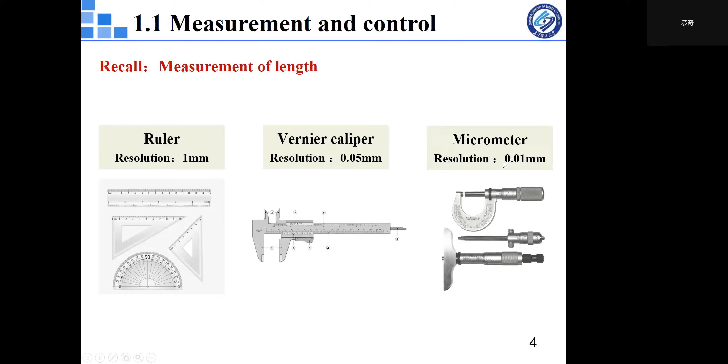And the grating ruler's resolution is up to 0.2 micrometer. The measurement resolution of the laser interferometer is 1 nanometer.

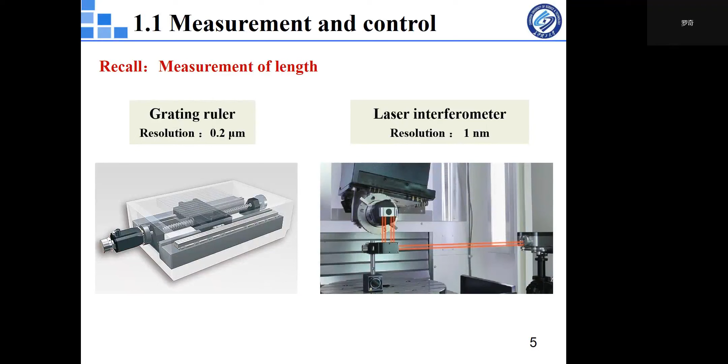One of China's greatest scientists, Qian, said the key technology of the new technology revolution is information technology. Information technology is composed of measurement technology, computer technology, and communication technology. Measurement technology is the key and the foundation.

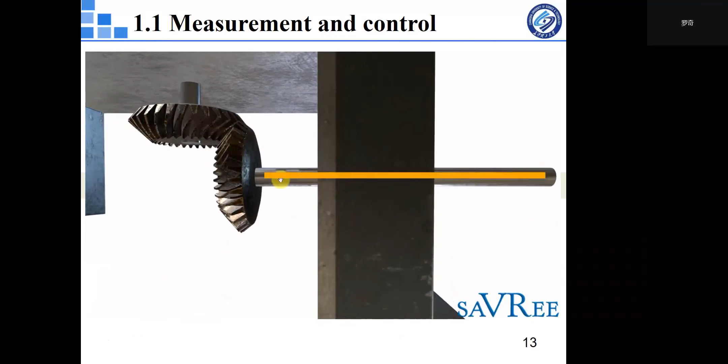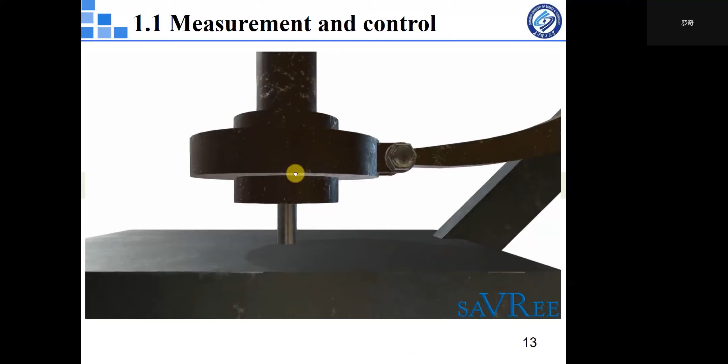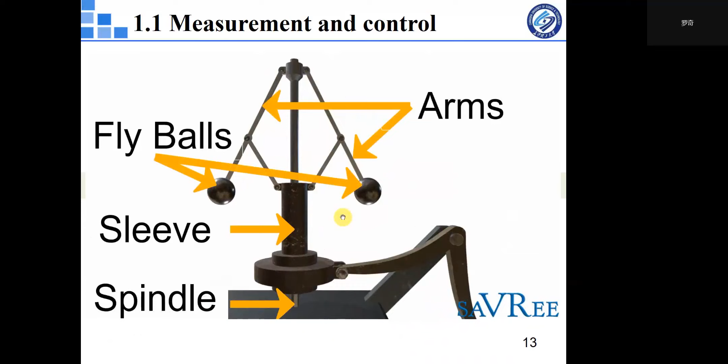Two round objects, the fly balls, then two linkages and two arms. Now what's going to happen is as the centrifugal governor spins, as the whole thing spins, you're going to see the sleeve, the lower piece, moving up and down. See it moves up and down, it's going to the linkage right here, and that is going to then open, change the position of this valve there.

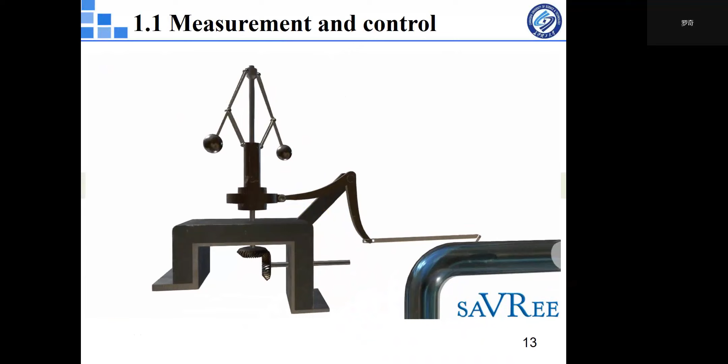So I talked you through how it works, but I probably should have shown you a bit easier. So that's spinning, and it's spinning quite slowly. Now it's increased in speed, so the sleeve has moved up slightly. There it goes up again, I can show you again.

Slowly increase in speed, the fly balls move out, and now they're at the furthest position. Notice that the fly balls now are extended further out from the sleeve than they were originally.

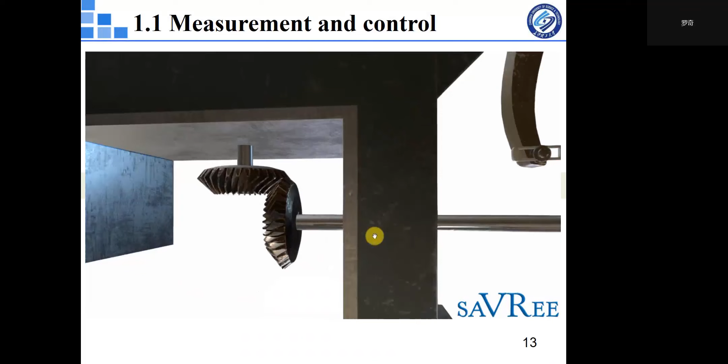What's happening is an engine will be rotating at a certain speed, let's say 100 RPM, and it's going to rotate the horizontal shaft at 100 RPM, assuming the shaft is geared directly. We transfer 100 RPM through the bevel gear here to the centrifugal governor.

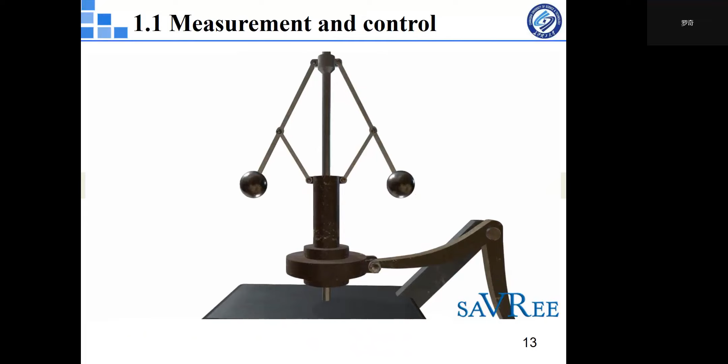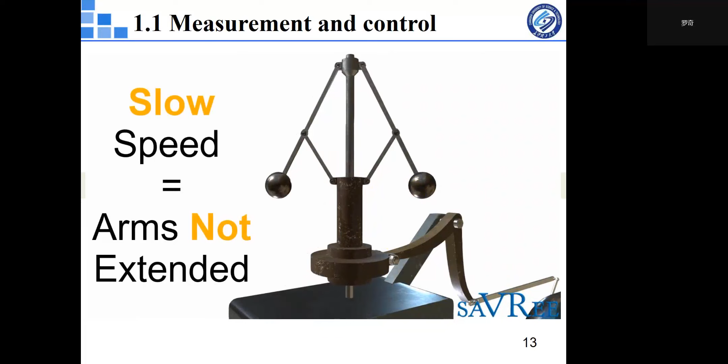Notice the arms are not particularly far away from the sleeve, but at increased speed, let's increase now to 200 RPM, the arms have moved further away. Now to speed it up even further, see the arms are really quite far from the spindle.

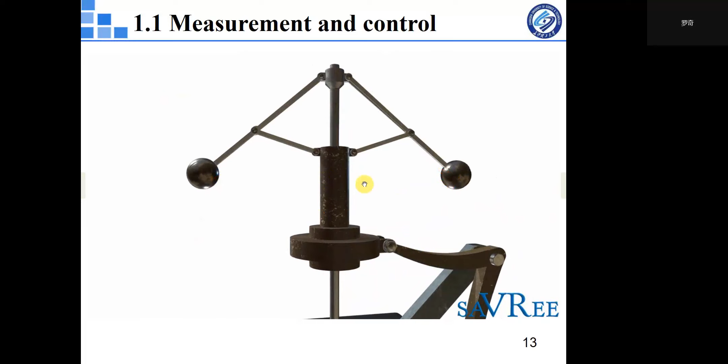As speed increases, the weights or fly balls move further and further away from the central stem, and as they do this, they push up this sleeve section. The linkages only allow them to travel so far, and as the weights move out, they pull the central sleeve. We had three different speeds: 100 RPM, 200 RPM, 300 RPM. At decent speed, the balls get thrown further and further upwards until they reach their maximum limit.

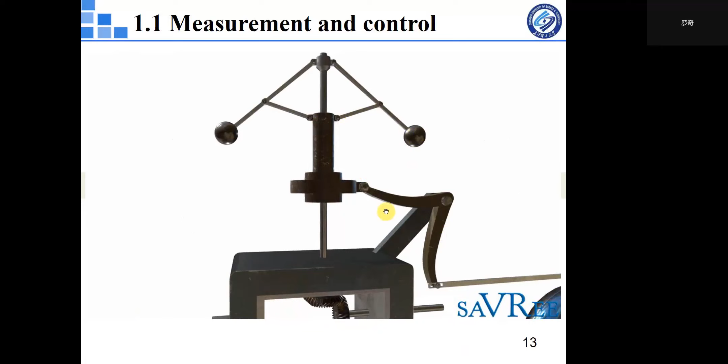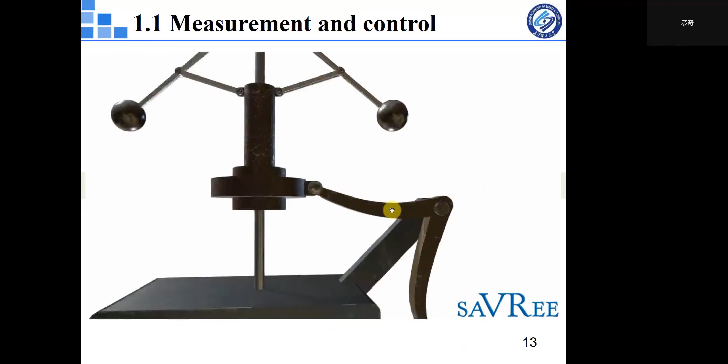So all we're doing really is taking the speed of the engine and representing that by this governor. The governor, connected to this lever type arrangement, jumps from there to there, and down, then comes on there to there, and finally the whole shaft comes through the wall, through the pipe.

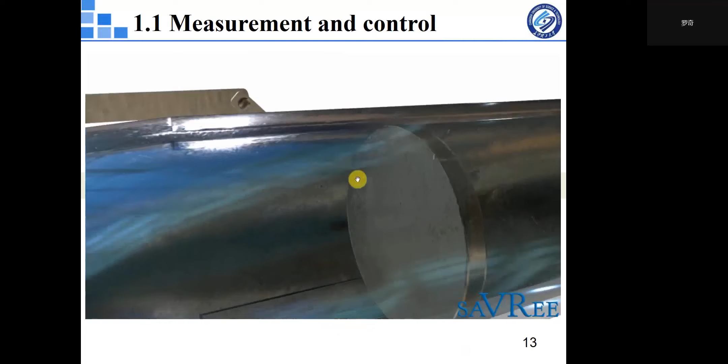And we have here a valve. So we've got here a valve, and what we do, if I zoom out again, I'll try and get the governor into the picture at the same time as the valve.

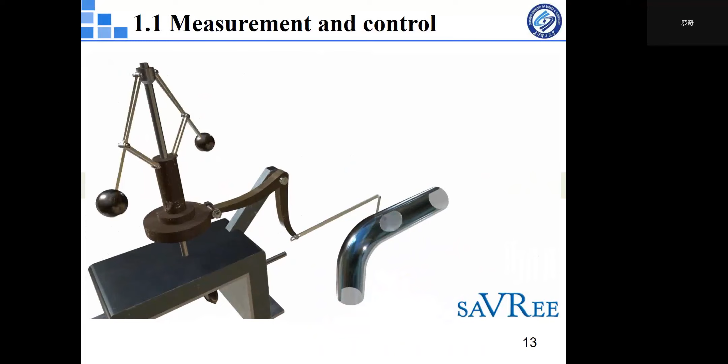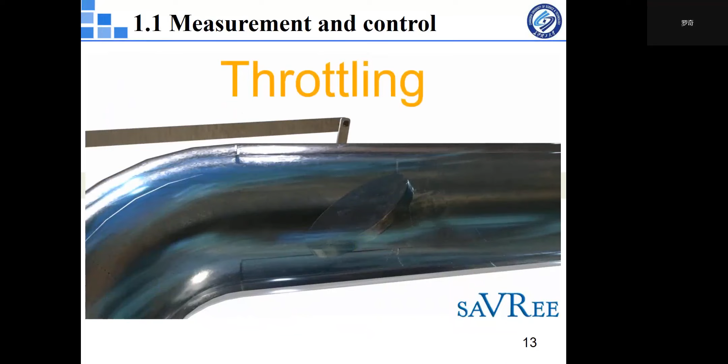So the governor is slowed down now. We're at 200 RPM, this valve is only halfway open. So that's something we call throttling. Now pretty much fully open, we can see the governor arms have come down again. Now further, now it's slowed down.

Let's run through that again. Change position, now it's throttled. It's running at 200 RPM, and now it's running at 300. Let's imagine that's very, very fast, and the valve here is now closed.

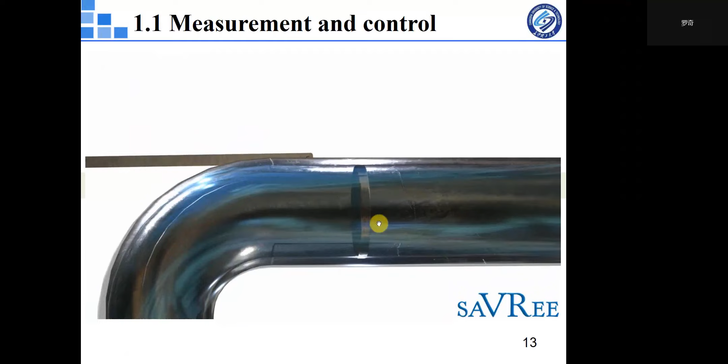So why would we set up that centrifugal governor like that? Well, the reason we set it up like that - imagine that in this pipe here is a lot of steam. So steam is coming along here, and it gets stopped by the valve. The valve is throttled, it's not open.

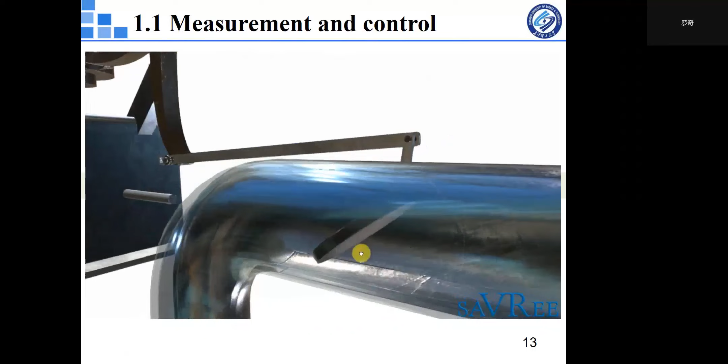At 200 RPM, the steam can flow through again. So what's going to happen now? It's flowing through. But maybe the engine, or whatever it is, the steam that's coming through there has not taken effect yet, so the engine has not accelerated yet. Imagine you've got a steam engine.

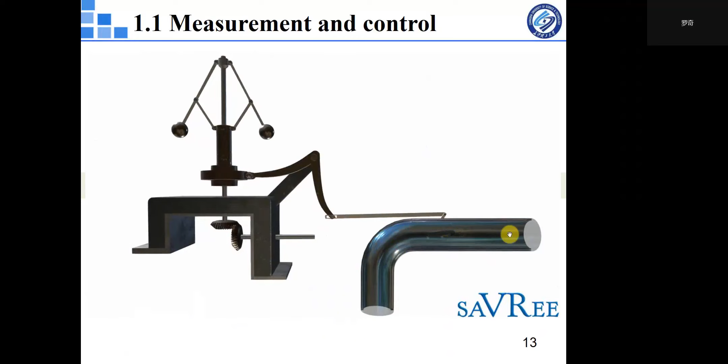Keep playing it, now it's fully open. If we're allowing all of that steam to pass through the valve to go to the steam engine, then the steam engine should start to accelerate again. And that's exactly what happens. Now it's accelerated, and now it's operating at maximum speed or near maximum speed.

So we want to close the steam inlet valve. Using this arrangement, we can control the steam going to the steam engine, and by controlling the amount of steam, we control the speed of the engine. This is a very simple way to control engine speed - it means we don't have to have somebody there constantly closing it, and it does it all automatically.

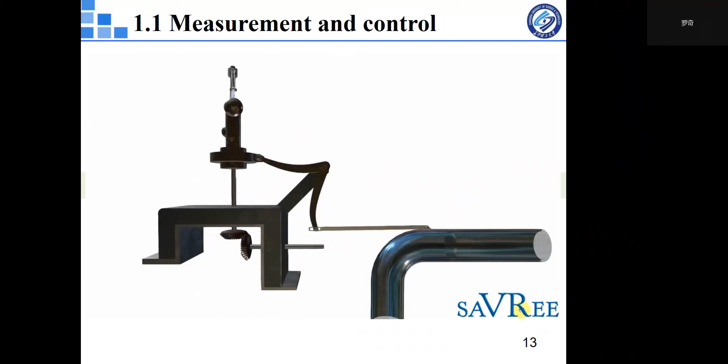Essentially that's what the centrifugal governor does. Again, now we're fully open, we want the engine to increase speed. The engine's increased, so we close the valve a bit. Now it's going too fast, and we've completely closed the valve. That's it - it will toggle between these three different positions.

You can set them up so they're accurate, so the tolerances are minor. For example, imagine you wanted it to operate between 1300 RPM and 1500 RPM - then you can set up the valve and the governor accordingly.

Simple design, but very effective. The Victorians really did have certain mechanical engineering skills, and personally, I find it quite a wonderful machine.

Okay, let's go back to this diagram.

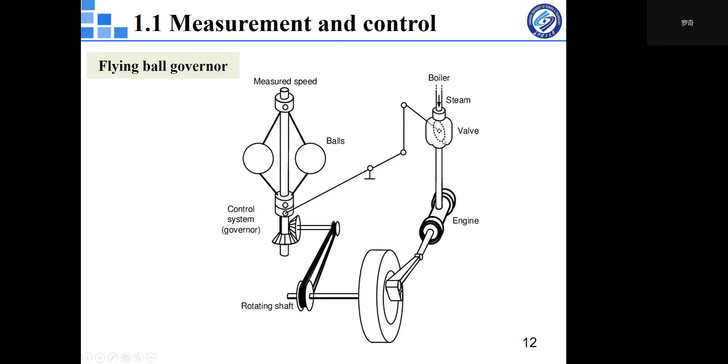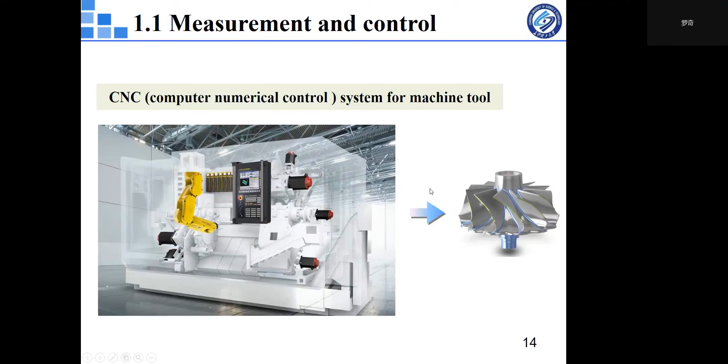The CNC computer numerical control system for machine tools are equipped with very precise measurements and control systems to produce a variety of complex and delicate products. Measurements and control are two tasks for mankind to understand and transform the world, and the measurement and control system is a tool and means for mankind to achieve these two tasks.

Products related to measurements and control affect 66% of the economy, with a volume of 4% of industrial GDP.

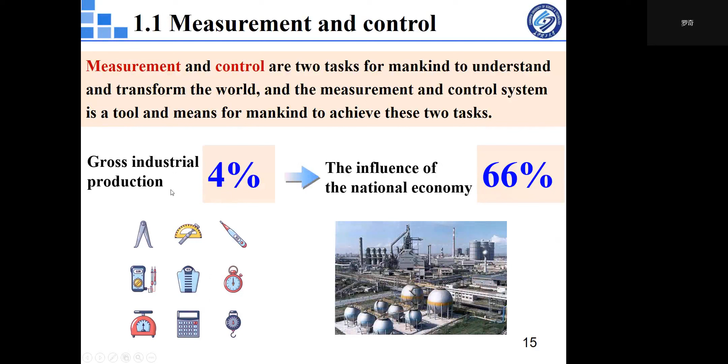In the 1950s, pneumatic instruments were invented. The measurement range of the pneumatic signal is 20.67 to 103.13 kilopascal.

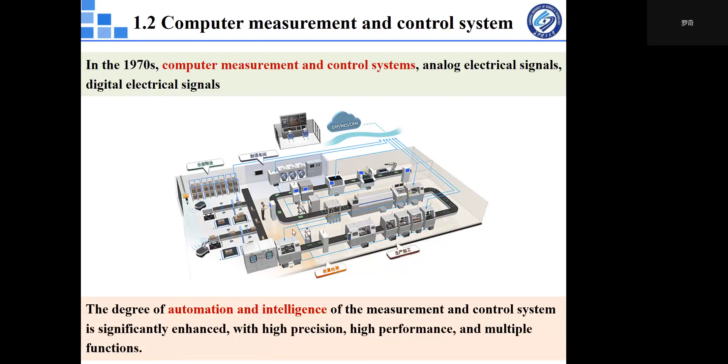Computer technology brings new features and new functions to the measurements and control system. First, auto zero function, which automatically zeros the output value of the sensor before each sampling, thus greatly reducing the error caused by drift changes of the measurement and control system.

Second, automatic range switch, which can change the measurement range and the control range according to the size of the measured value and the control value, and improve the resolution within the essential measurement and control range.

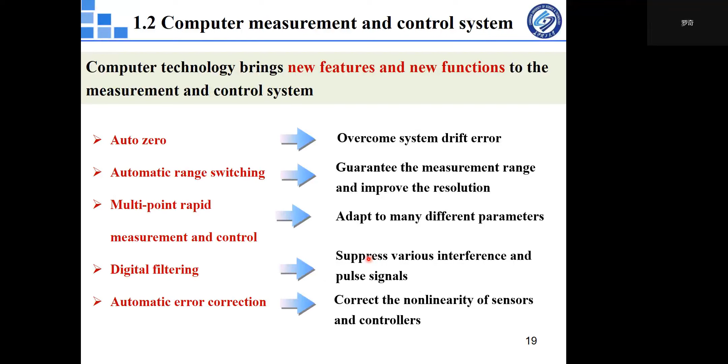Computer technology brings new features and new functions: data processing, this function can do statistical analysis, sort search, spectrum analysis, and so on; complex control functions, such as PID control, adaptive control, fuzzy control; and multimedia, such as sound, light, and voice.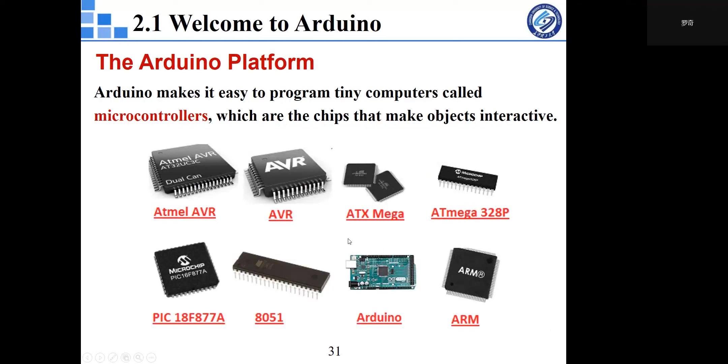We are surrounded by these microcontrollers every day. They are embedded in tablets, thermostats, tools, remote controls, microwave ovens, and even some toothbrushes. They perform specific tasks, and if you hardly notice them, it's often because they're doing it well. They have been programmed to sense and control activity using sensors and actuators.

Sensors listen to the physical world. They convert the energy you give off when you press buttons or move your arms into electrical signals. Buttons and knobs are sensors that you touch with your fingers, but there are many other kinds of sensors.

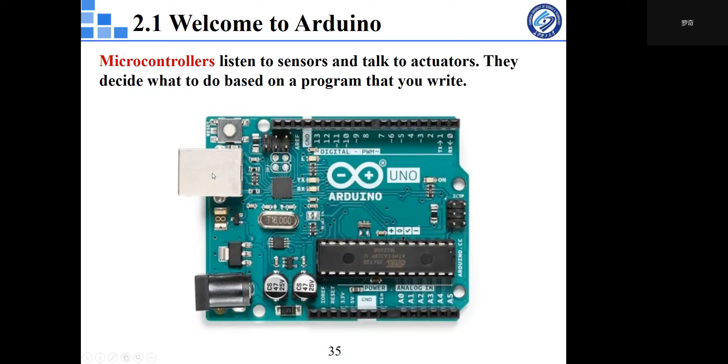Physical electrical parts commonly used in Arduino-based system control are resistors, push buttons, batteries, drive motors, breadboards, Arduino control boards, displays, and so on.

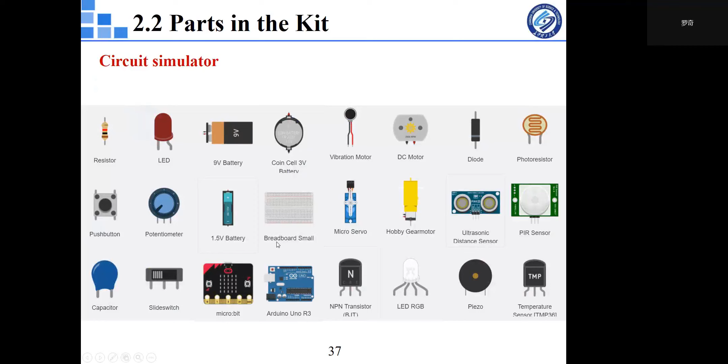The components provided by the simulation platform are resistor, LED, battery, vibration motor, DC motor, push button, breadboard, small Arduino, and so on.

Let's take a look at the modules on the Arduino control board. First parts.

The power connector: this is how you power your Arduino when it is not plugged into a USB port. It can accept voltage between 7 to 12 volts. You do not need to do anything with this in the circuit simulator; the board is always powered.

The USB port is used for powering your Arduino, uploading your sketches, and communicating with your Arduino sketch. Again, you do not need to worry about the port in the simulator; the board automatically communicates with the program.

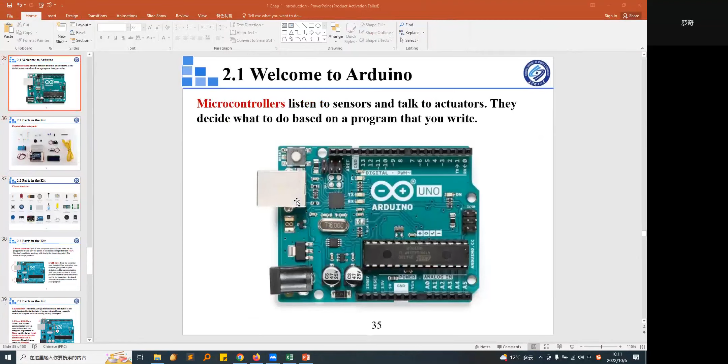Okay, some students said they cannot enter the simulation platform. This simulation website is not very stable. When something is wrong, you can choose to login again, and sometimes you need to use the VPN.

When you use the VPN, the simulation website is very stable. So you can use the VPN when you use the simulation platform.

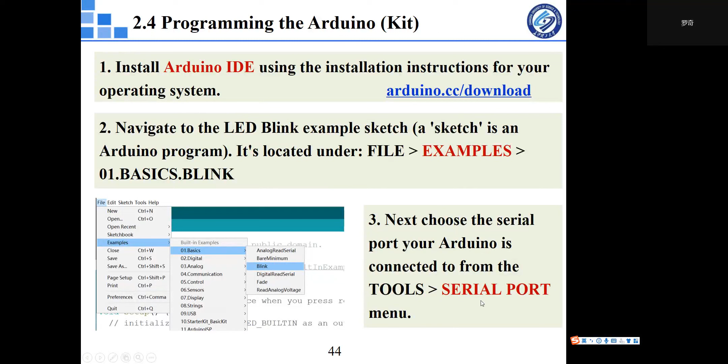The next step is to upload the Arduino sketch to the board. And the last step, the Arduino will take action.

You should see a bar indicating the progress of the upload near the lower left corner of the Arduino IDE, and the lights labeled TX and RX on the Arduino board will be blinking. If the upload is successful, the IDE will display a message.

So when you see the lights labeled TX and RX on the Arduino board blinking, you have successfully programmed the Arduino to blink the onboard LED.

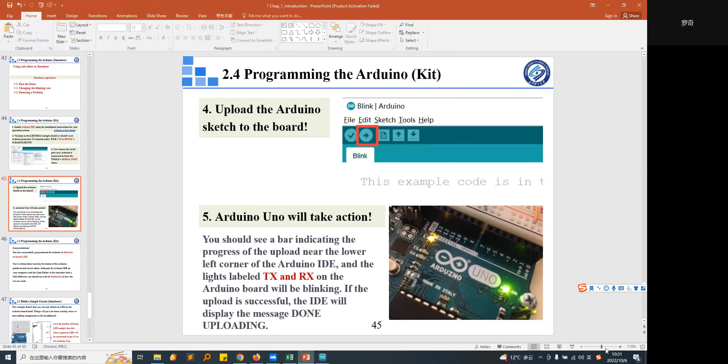Okay, let's go back to PPT. We learn about programming the Arduino in the simulation environment and the physical environment.

Let's learn about how to build a simple circuit in the simulator.

The example sketch that you run only blinks an LED on the Arduino board itself. Things will get a lot more exciting when you start adding components to the breadboard.

In the circuit schematic, a button is used to connect and break a connection that allows current to flow through the LED and the resistor.

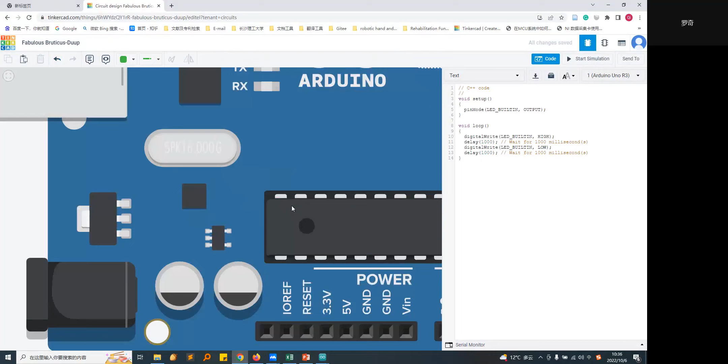Now we build our first simple circuit. This is our first interactive circuit, using a button, a resistor, and an LED.

You are going to use the Arduino in this project only as the source of power, plugged into a USB port, or a 9 volt battery. So the Arduino will provide 5 volts from its 5V pin.

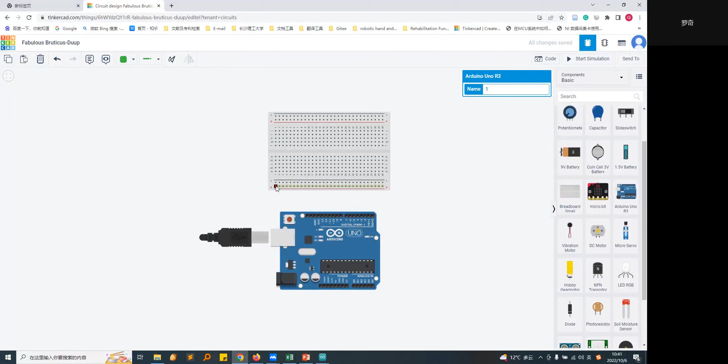We can connect a wire between the 5V pin on the Arduino and the red power rail on the board. The color will match the red.

And next, connect ground on the Arduino to the black ground rail on the breadboard with a wire. The ground on the Arduino to the black ground rail, with the black wire.

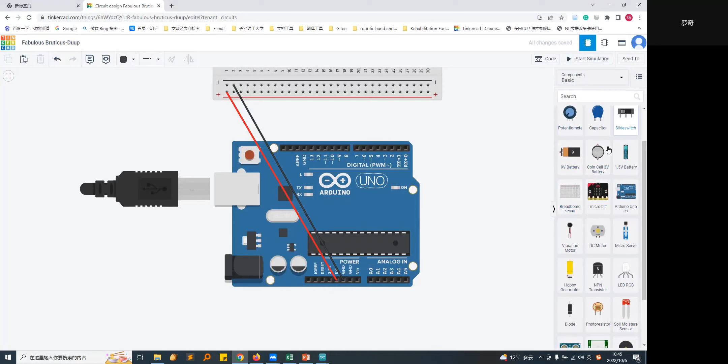In this step, use a 220 ohm resistor and LED. You will set the resistor value.

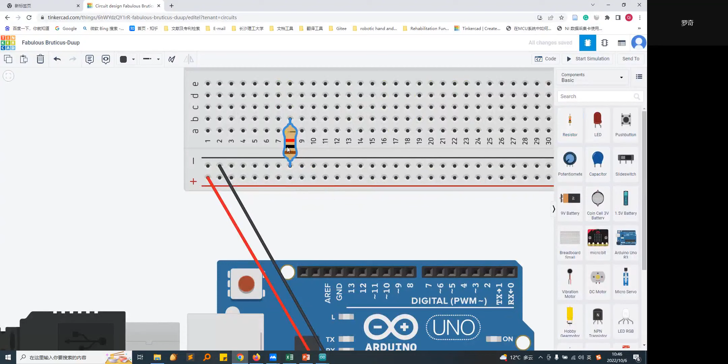Now you will set the resistor value by highlighting the resistor and using the drop-down menu.

We can see we can change the resistance. You will set the resistance value by highlighting the resistor and using the drop-down menu. You can review the resistor color code in the project.

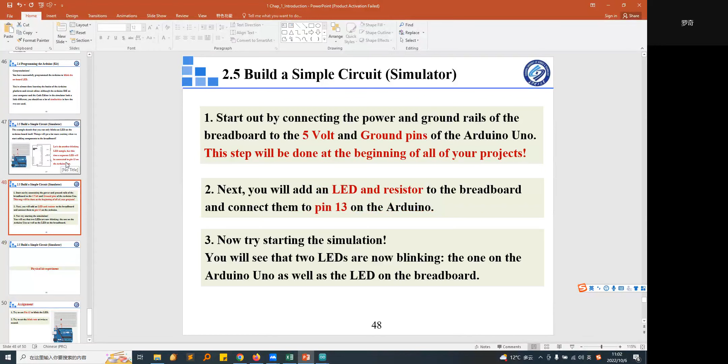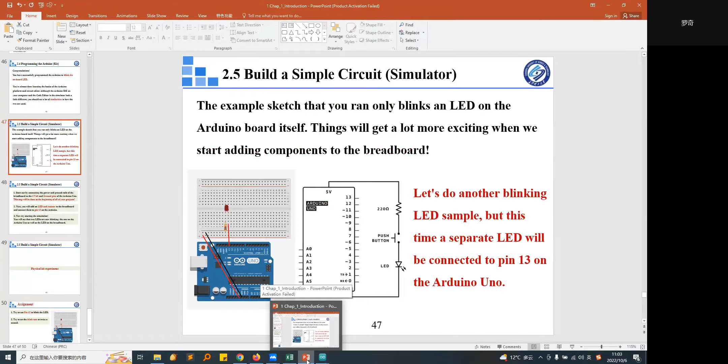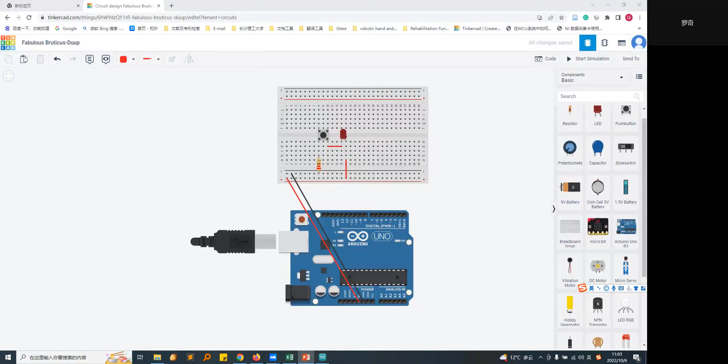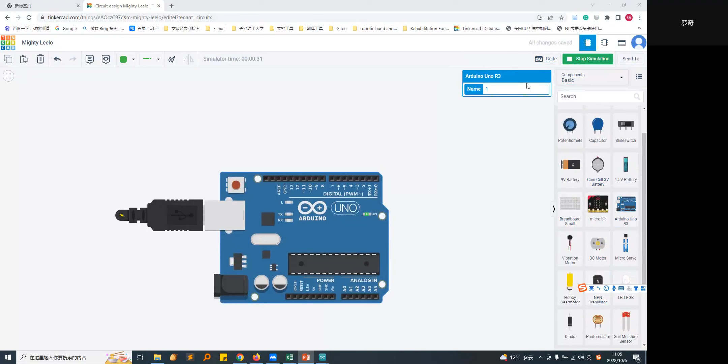Okay, we can see another simulation, another simple example.

When we click the simulation, we can see the lights work. When we change the delay to 10, you can see the lights changed.

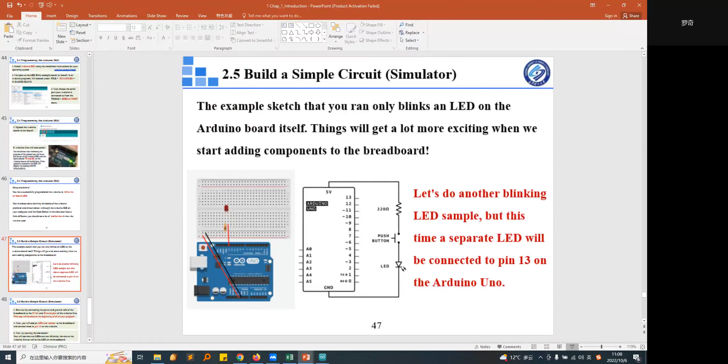Okay, let's use the simulation platform to complete the assignments. There are two segments. The first one is try to use pin 12 to blink the LED. And the second is try to set the blink rate at twice a second.

Laoshi, what is the deadline to submit the assignment?

The delay, we can see it here. The delay time you can adjust.

Laoshi, when do we need to submit the assignment? What is the deadline?

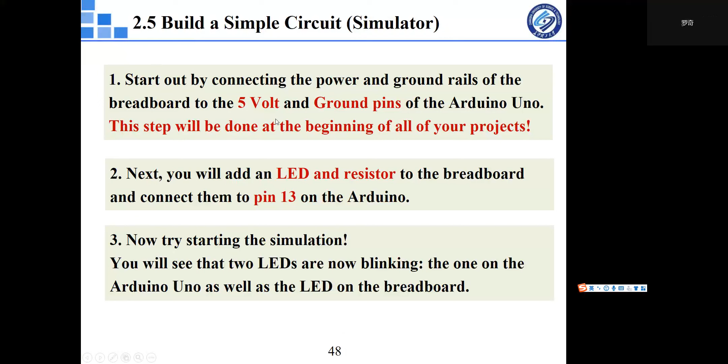I just did a demo for building a simple circuit. The pin is 5 volts, you can see. The assignment: try to use pin 12 to blink the LED, and try to set the blink rate at twice a second.

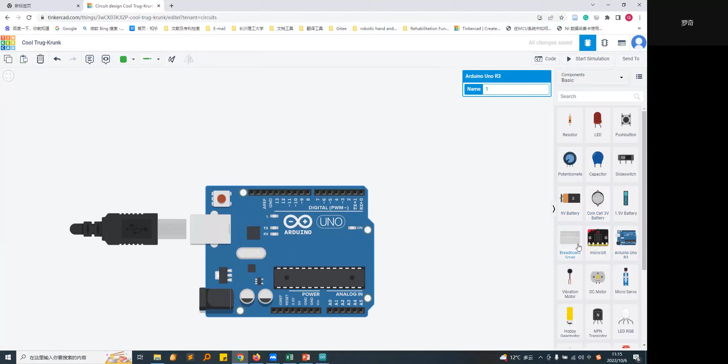Continue to use the Uno board, like the breadboard. Laoshi, after finishing this, how will we save the file? After finishing the project, how will we save the file?

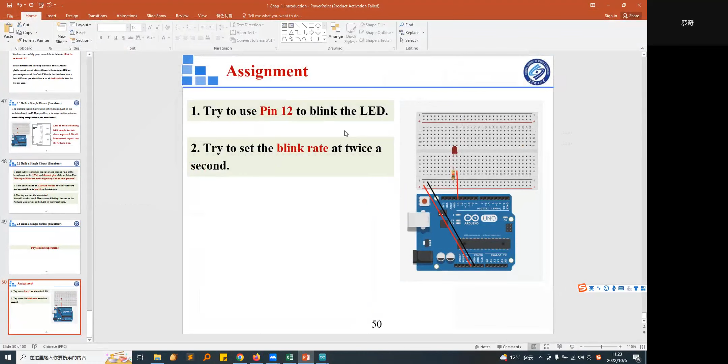So the assignment is very simple. First, try to use pin 12 to blink the LED. The second is try to set the blink rate at twice a second, using pin 12.

Have any students finished the assignment simulation?

Now, yeah, Laoshi, this software doesn't work. It showed a 404 error. How can we fix this?

Maybe you can use the VPN, because the internet, this online software, is sometimes not stable.

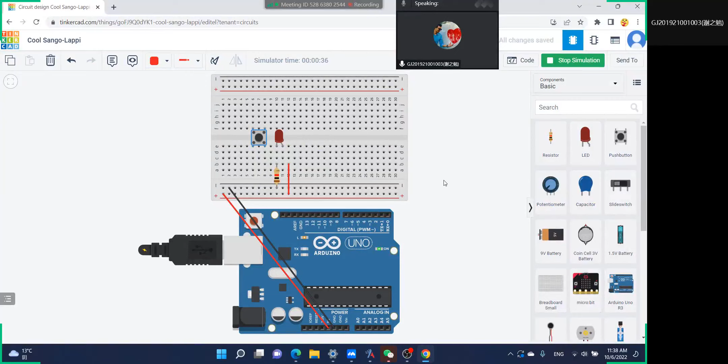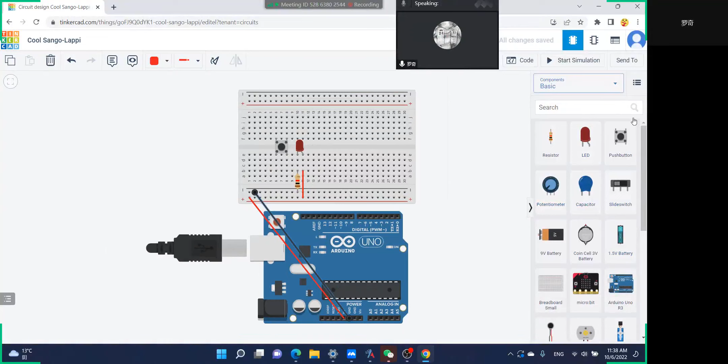You try to set the blink rate, twice a second. Change which one? Blink rate. This line? Change the blink rate. Code. Code, code. Code. And then choose the code. Which one, Laoshi? I have to select. You can use the drop-down menu to change the code mode.

Blocks. Choose the text. Yeah, continue. And then change the delay time. Delay time, it's 500, right? 500. And then no. Oh, the second one, delay time, it's also 500. Delay time. Yeah, then click start simulation.

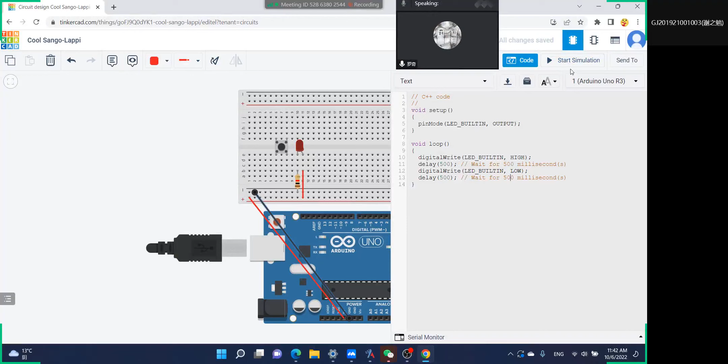You change the delay time to 500. 500, okay. First, stop simulation. Stop simulation. Listen, yeah. 500, right? Yeah. Then click start simulation.

Yeah, you can add the lights, the L, in the Arduino. Here? The blink rate is changed. You can, hello, change.